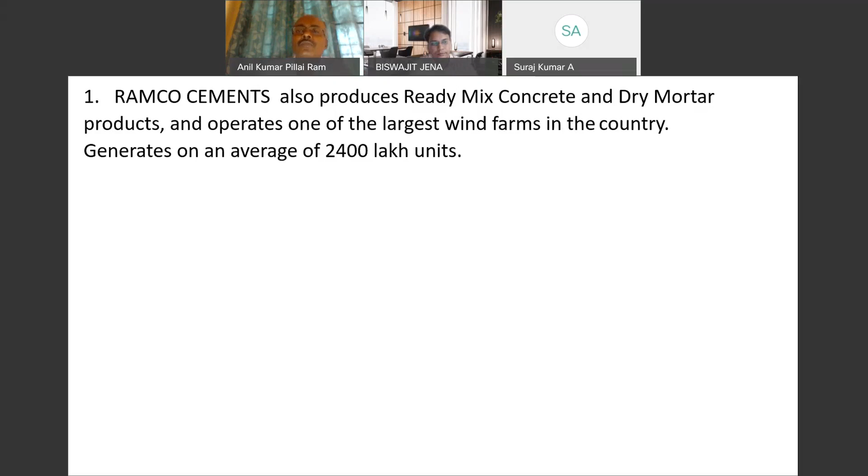Another thing we have tried to do is that whenever we make cement, apart from our research center, we also make concrete at our ready-mix concrete unit, so that we get the entire feedback of cement, concrete, as well as the research aspect of it. We ensure that the latest technology is incorporated at all stages of manufacturing, whether it's from mining, because in mining, if you see surface miners...

Anil sir, you there? I think there's a little technical issue. I think power has gone at Anil sir's place, Engineer Biswajit sir. In another minute's time or so, he will join in through the phone. We regret the inconvenience. He should be back any time now.

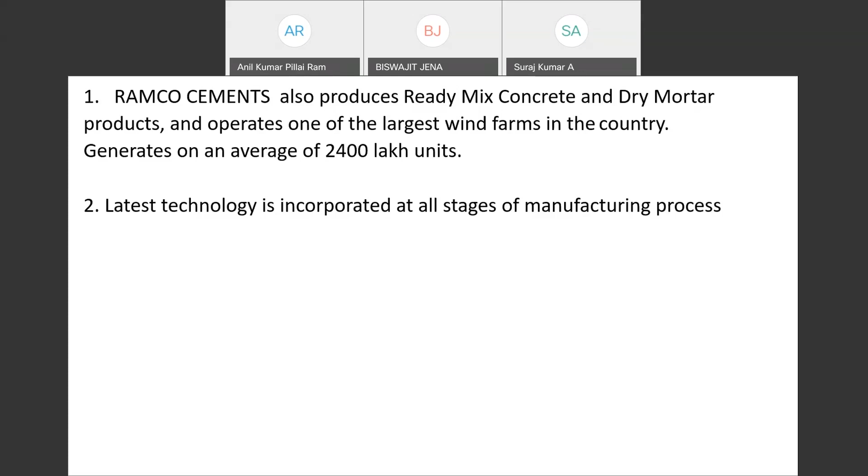I think the mic is muted, sir. I'll unmute it from my end. Bit of a connectivity problem from my side, so let me just share the presentation again. Am I able to share it? Are you able to see the presentation? Yes, sir, yes, sir. Biswajit sir, you there? Yes, I'm here. Can I request you to switch on the video, please? Yes, okay, thank you.

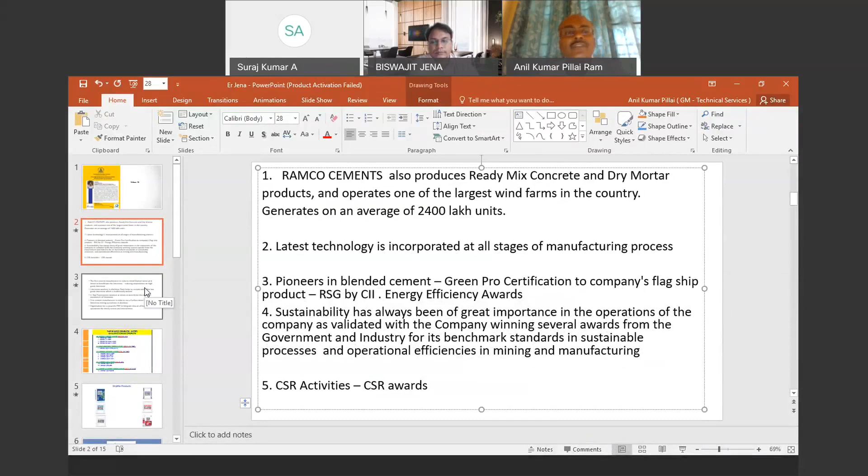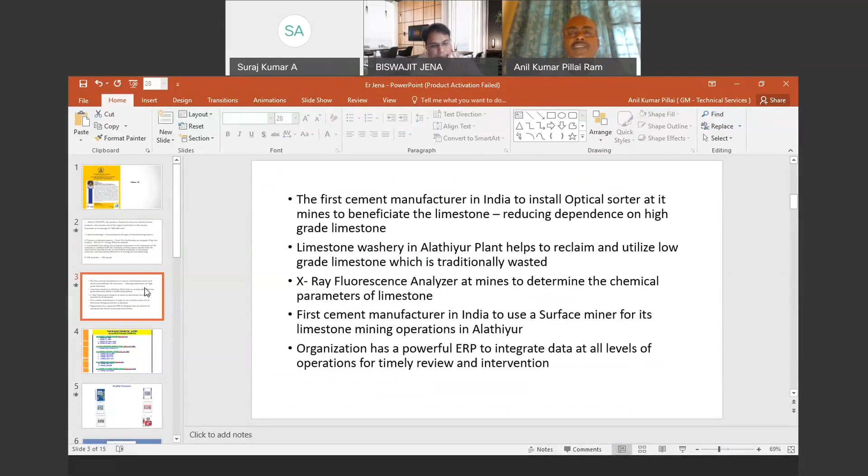It's getting loaded. So we have been doing all this, and especially as far as blended cement is concerned, we have been able to introduce blended cement and ensure that the various brands within it, whether PPC or PSC, we have been able to do that. Various kinds of testing equipment for testing raw materials as well as testing cement at various stages has been implemented, and that is a very important thing.

So, the customization of cement ranges from Ordinary Portland Cement, Rapid Hardening Portland Cement, PPC, PSC, as well as SRPC cement. Ordinary Portland Cement, as we know, the latest IS code talks about IS 269, and we have various brands of cement: 43, 53, 43 Infra, 53 Infra. Infra cement is meant for longer slump retention time. Then we have Ramco Superfast for precast applications, and Ramco Super Grade, Supercrete, Super Fine, Super Plus, which are various brands of Portland Pozzolana cement.

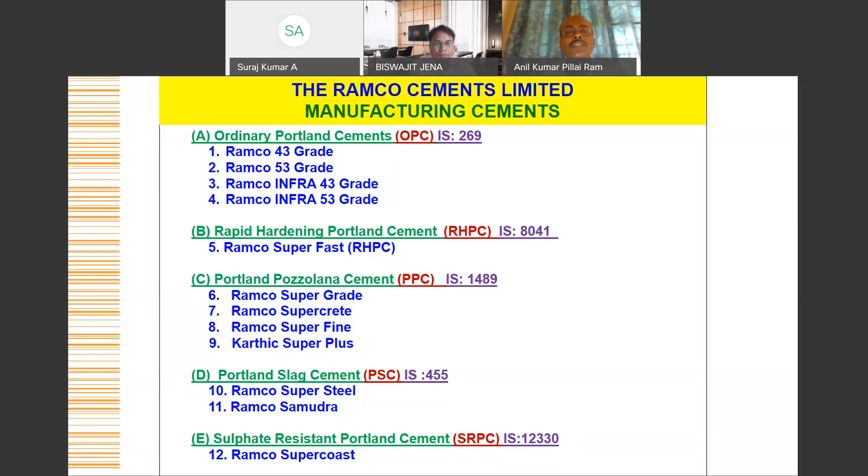Super Steel and Samudra for slag cement, as well as Super Coast for SRPC. So what is important is to try to understand the type of concrete being used, and then look at the type of cement, non-structural cement products from our dry mix plant, and of course the Ramco Supercrete cement, which has been introduced specifically for concreting.

It gives high performance concrete with regard to compressive strength, durability, as well as workability. This is the cement which we launched a year back, and it has got very good feedback from various professionals.

As far as these three parameters are concerned, high compressive strength they have been able to get, because if you look at small sites, the kind of practices they follow is not up to the mark. So what we have done is try to develop a cement accordingly.

Of course, it doesn't mean one should compromise on good construction practices, and curing has to be done. But what is important is that this cement gives high compressive strength and at the same time low heat of hydration. That is where you get a combination of high compressive strength, enhanced durability, and excellent workability. All these three parameters are there when you use Ramco Supercrete cement.

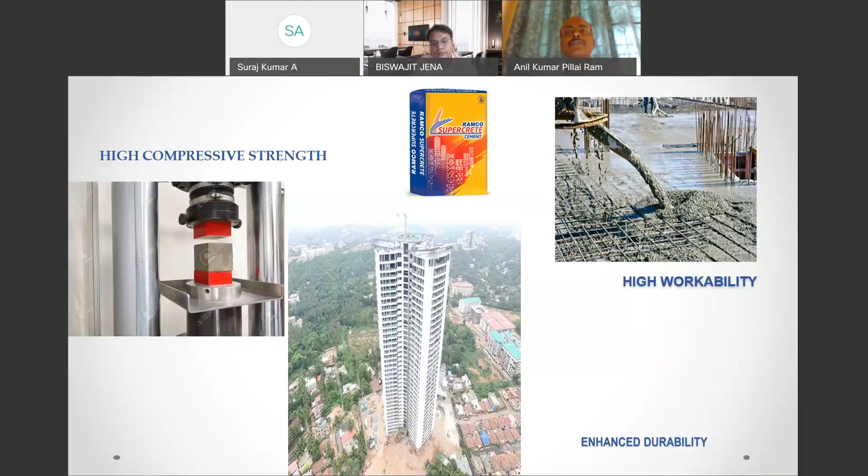We have the Ramco Research Development Center at Chennai, where we do a number of works, and that is very important, because if you see the R&D investment in the industry, it needs to be increased. That is where we have been able to contribute as far as R&D development is concerned.

We have various equipment to test the cement as well as to do mix design, and to ensure that our customer gets the best service as far as concrete is concerned.

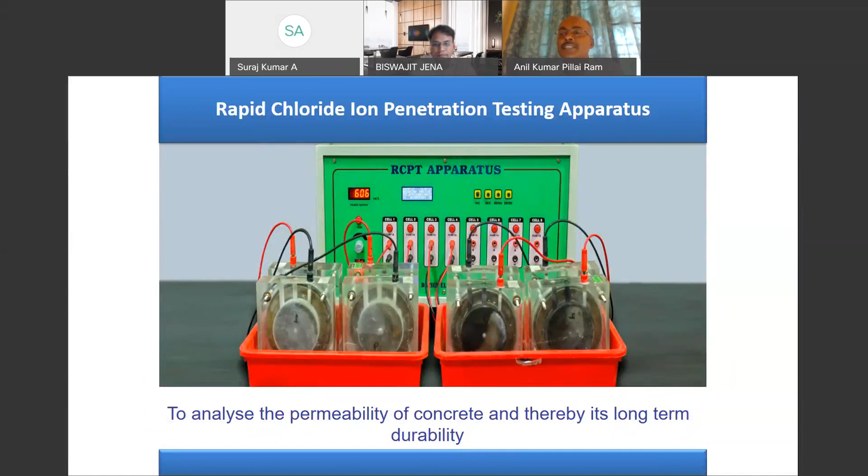So various kinds of testing methods for checking the durability of concrete. We have the rapid chloride penetration test, where durability is measured using a specimen, and charge is passed through it, and based on the amount of charge, you can evaluate the durability of concrete.

And then we have the DIN standard water permeability test, where water is passed under pressure, and based on the penetration of water, we can check the durability of concrete. So that is very important, and we give importance to the durability of concrete.

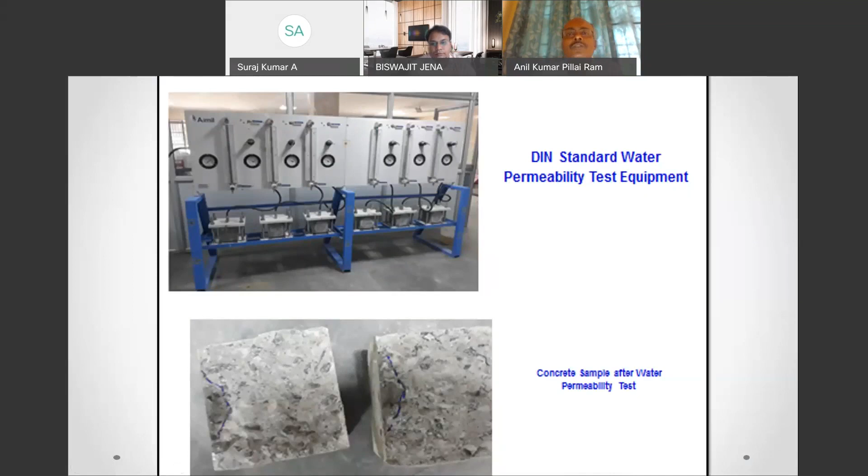So these are some of the things that we have got, and we work on the basis of right product for right application, because from an engineering perspective, that is what matters. We need to use the right cement for the right application.

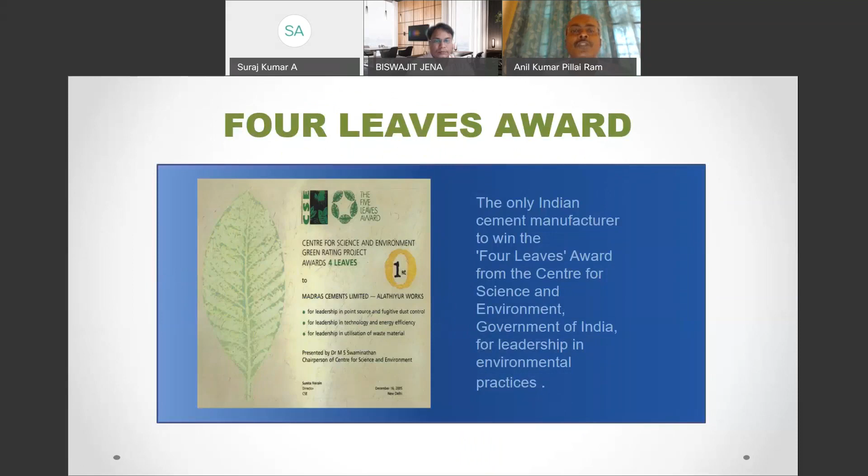Some of the awards that we have received include the 4 Leaves Award, and customers associated with us include Larsen & Toubro, ITD Cementation, and various projects in the eastern part of the country. We have a very good clientele in the eastern part of the country also, within a very short period of time, and that has happened because of the quality and kind of service we are offering, whether in terms of regular supply or quality parameters. They have been able to get it.

So these are some of the points that we thought we would share with you.

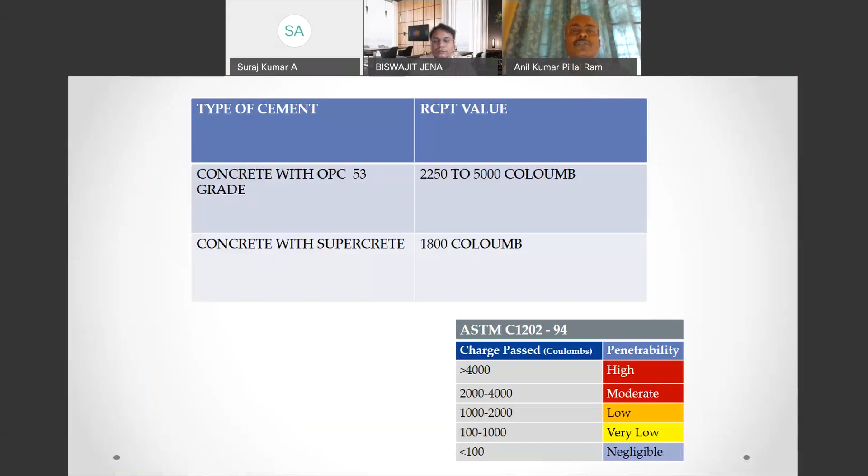As far as today's speaker is concerned, we have Engineer Biswajit Jena, Assistant Professor, Department of Civil Engineering, DRIEMS Autonomous Engineering College, Cuttack. He completed his BTech in Civil Engineering from KIIT University, Bhubaneswar, followed by MTech Structural Engineering from NIT Rourkela. He is a visiting faculty to the Department of Civil Engineering, CUTM, Bhubaneswar. He worked as a civil engineer and design consultant, associated with STUP Consultants Private Limited at Kolkata Metro, as senior engineer at Simplex Infrastructure, and assistant engineer at Nagarjuna Construction Company, IOCL Paradeep.

He was awarded a research project on waste utilization in self-compacting concrete and effective assessment of environmental benefits under the collaborative research and innovation scheme. He was also awarded twice as Super Teacher 2019 and 2020 by Lecture Notes Private Limited, Bhubaneswar. He was invited as keynote speaker on skill development initiatives for youth organized by College of Engineering and Technology, Bhubaneswar, and has provided research guidance to 20 MTech students so far, of which 6 have completed and 14 are ongoing. He has many research publications in renowned journals like ICE and International Journal of Civil Engineering and Technology.

So with those few words, let me invite Engineer Jena to share his presentation on ultra high performance concrete, because nowadays we talk about the performance of concrete.

It is not only compressive strength that is important, it is workability, it is durability, and measurement of all these parameters that gains critical importance.

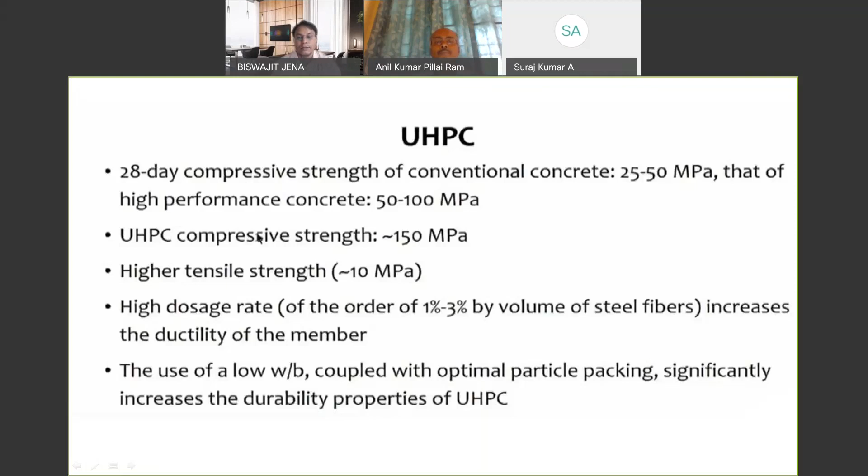A high compressive strength is not just enough for concrete when we are designing for ultra high performance concrete. You can have high compressive strength for certain applications, but you need high ductility also, along with high resistance to corrosion and aspects of durability. So the idea is that you can arrange the material microstructure through careful selection of materials, careful design of constituents, and proper construction practices to get a really high property of ultra high performance concrete. This is the main or core idea of designing ultra high performance concrete.

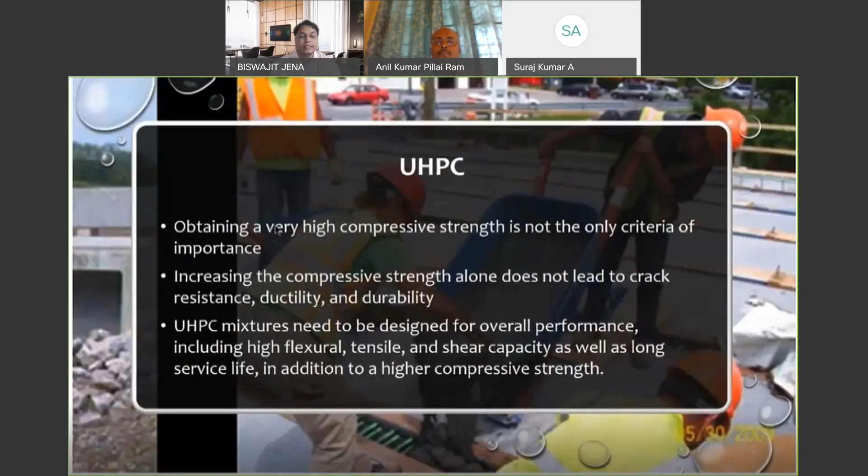Now, what are some advantages that you don't have with conventional concretes? You can get strength up to 100 megapascal with high performance concrete, but in conventional concrete, if you have really heavy load bearing members like bridge girders or bridge columns that carry extremely high loads, you need extremely tight rebar cages. If you have such tight rebar cages with so much steel, it obviously increases the cost of the structural member, and you need such dense reinforcement to control shear cracking.

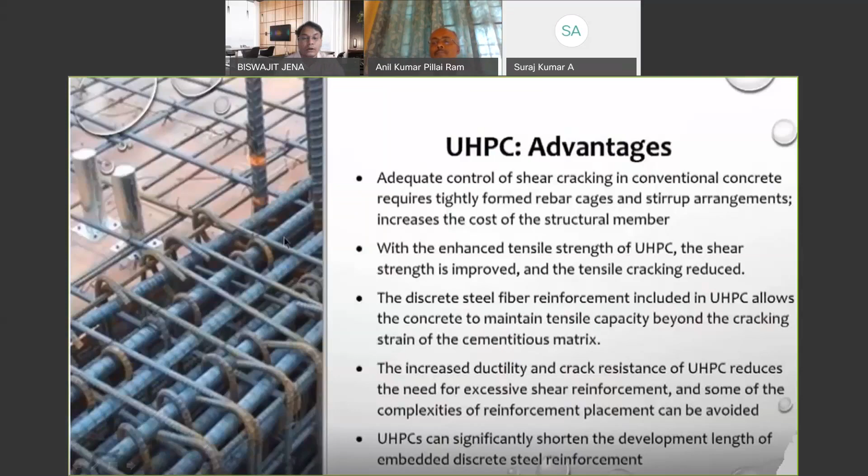So some applications are there with enhanced tensile strength. You can reduce shear cracking by improving the shear strength, and tensile cracking is also reduced. The discrete fiber reinforcement, steel fibers spread in a discrete fashion in ultra high performance concrete, helps in maintaining the tensile capacity beyond cracking, which means you have high ductility of the member. Also, if you have such high strength concrete, the development length for your rebars can be reduced.

So you have a lot of these types of advantages which you don't get in conventional concrete through ultra high performance concrete. A few applications have been used in the United States for a few years now for very selected applications. These are a couple of bridges: Mars Hill Bridge in Iowa and Cat Point Creek Bridge in Virginia.

These are some of the bridges that have used ultra high performance concrete in their construction.

The way they normally want to use ultra high performance concrete is for bridge decks, because bridge decks are supposedly carrying very heavy loads and are supposed to last for a much longer period of time. But before ultra high performance concrete was used for bridge decks, the more critical application was bridge connections.

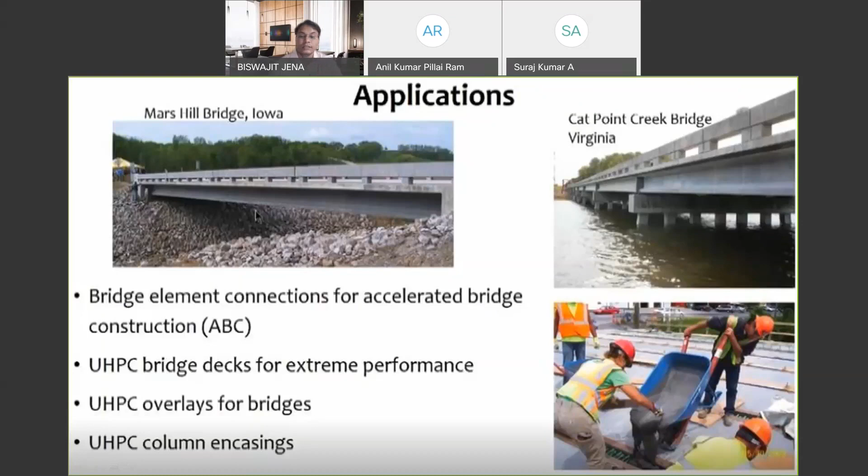Structural design is going to be different, but I will concentrate mostly on the materials part in this talk.

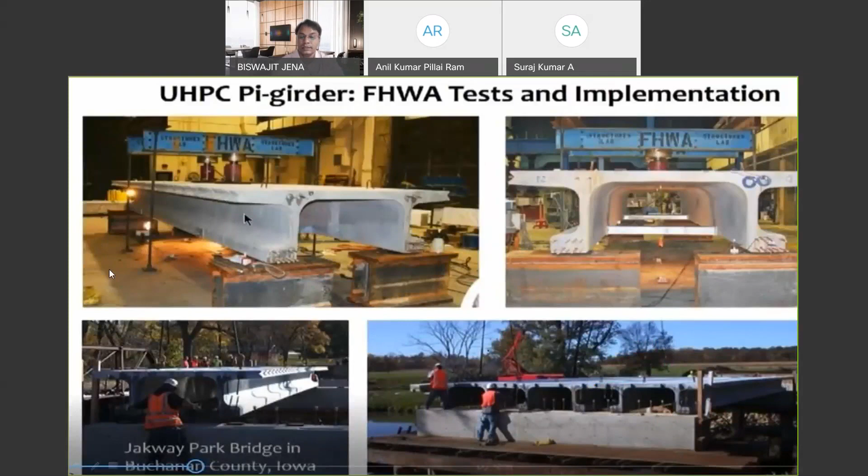Next, come to the field connections, like I talked about deck level connections. These connections are at the deck level where two panels of the deck are connected by means of ultra high performance concrete, or you can have the deck or girder connected to the support structure through ultra high performance concrete. So there are multiple ways of doing these connections.

The advantage of such extreme high strength is that the connections can be small, and you are always better off doing a smaller connection than a larger connection, because connections are where the weak point is. So you can now afford to have smaller connections, and you don't require post-tensioning of concrete within those connections because these have extremely high strength, including extremely high tensile strength.

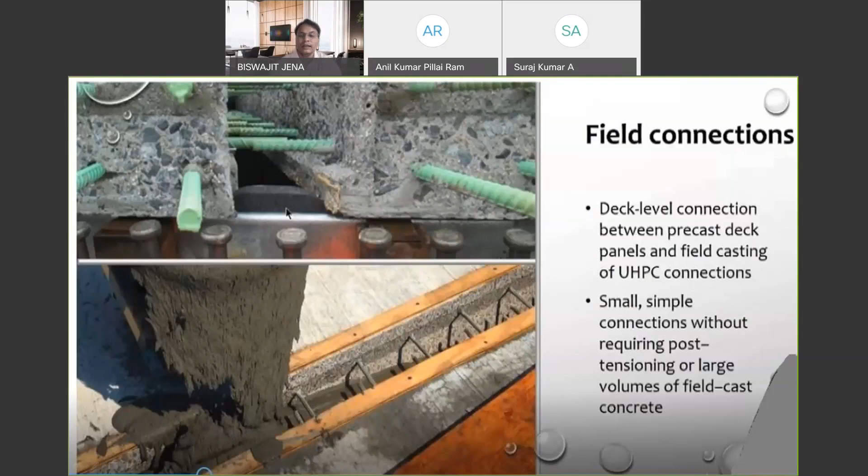So let's talk about material design. How do you design the ultra high performance concrete for such very high strength and very high durability?

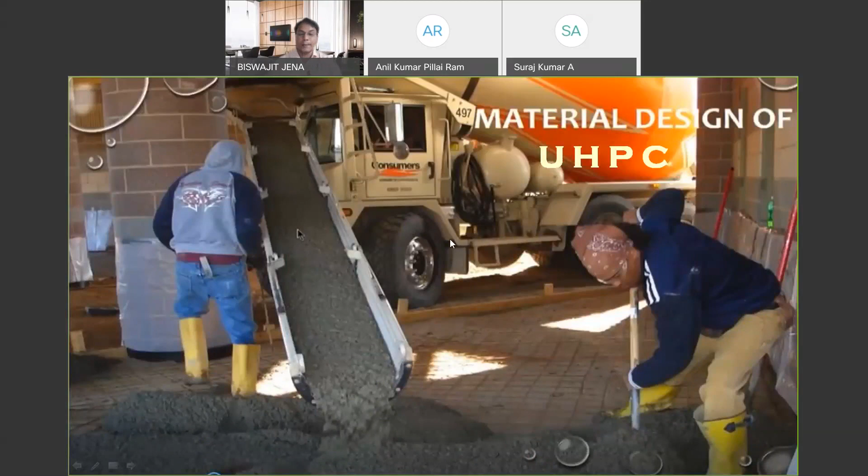The idea is that there are commercial mixers where you can buy commercial ultra high performance concrete mixes, about $2,000 per cubic meter, which is extremely expensive. To give you a perspective, conventional concrete costs about $125 per cubic meter. So that's talking about 15 to 20 times the cost, because these materials are proprietary with very special admixtures and additives.

But the idea is to make the science simpler, so that you can make these materials with locally available raw materials, making it easier for us to design the ultra high performance concrete. In that case, you don't have to go for very fancy powders or chemical admixtures. You can actually make it with locally available materials if you control what you choose to put in your concrete and how you make your concrete really well.

So you need extremely high admixtures. This is because your water cement ratio is going to be very low, lower than 0.2, between 0.16 and 0.18, which I will design in further slides. So it has to have a lot of admixtures.

Now we talked about connections. If you have to do connections, the concrete has to be self-compacting or self-consolidating to go and be poured into the connection, which I also showed you with very dense reinforcement casing in the previous slides.

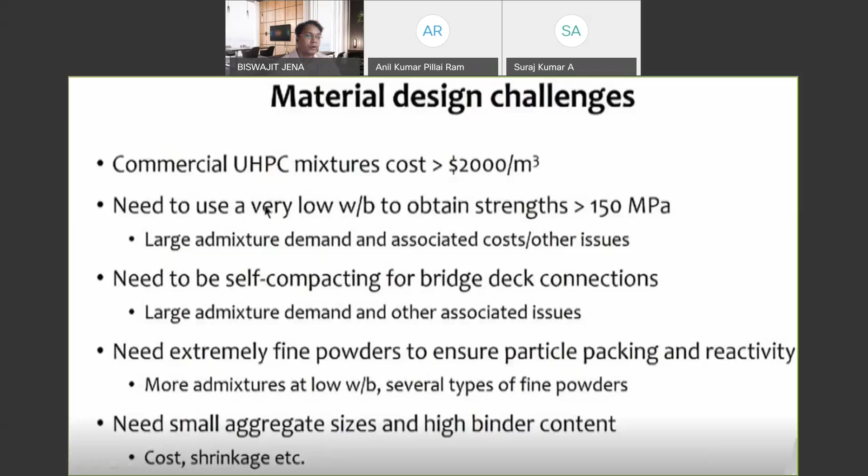So you have such a vast size distribution, and the other challenge is to make sure you have enough particles in all these size ranges to fill the pores really well, using a lot of admixtures to make sure this flows really well, so you can pour your concrete into all these very tiny areas. That's the challenge for us in designing ultra high performance concrete.

Next, we'll talk about this problem in two different stages - two different ways of doing it. You can have the deck and girder connections, or you can have connections between deck panels, and you can see the reinforcement in both cases being different.

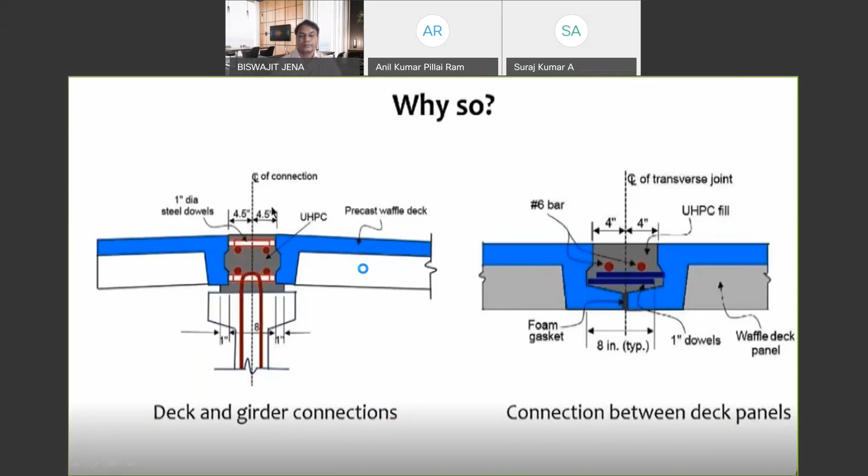You need a very high amount of Portland cement for two different reasons. My first reason is my water cement ratio is very low, which means only a small fraction of cement is going to be hydrating. If only a small fraction of cement is going to hydrate, I need more cement to make up enough of the reaction product.

The second reason is that I need a lot of fine powders, and cement, being a fine powder, has properties you can control really well. Those are the two reasons why generally we use a high amount of cement. But the downside is high shrinkage, so this has to be really well controlled in terms of curing and using materials like internal curing admixtures or superabsorbent polymers.

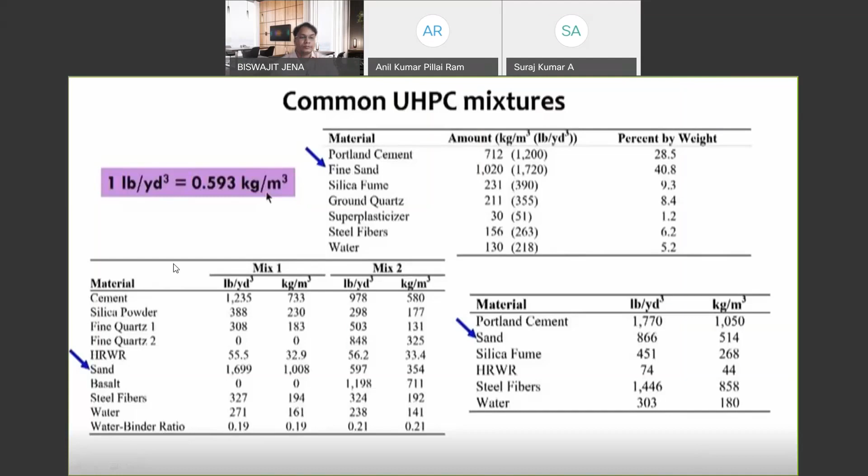So how do we design this material? How do we start designing from first principles? You have to select the binder materials you actually want, and that is the most important part. Cement is given, you need it. So if we use cement, what other than cement? What are the common ideas for selecting materials other than cement?

The first one is sustainability. If you have to make sure you are using as little cement as possible, you can use a lot of other base materials besides cement. The other aspect is that your cement has a certain size distribution.

If you look at particle size distribution of cement, you will have sizes from 1 micron roughly to about 100 microns. So normally it is distributed from 1 micron to 100 micron. So what happens to the sizes smaller than 1? We don't bother about sizes more than 100 micron because we have sand which will fill those spaces. But what about smaller than 1? In that case, the thing that comes to mind quickly is silica fume.

So you have to have materials that are smaller than 1 micron, which is silica fume. We can also have metakaolin, which you can use if you need some aluminate effect in it. So we have used both silica fume and metakaolin, and I will tell you why we have done that.

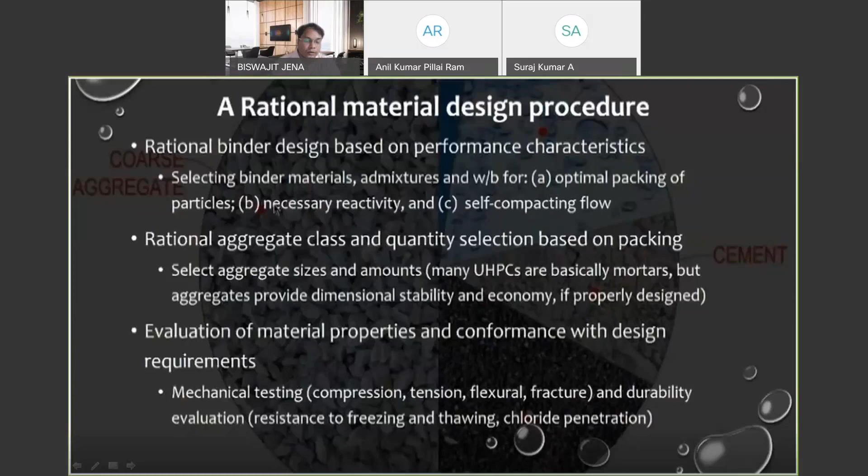So the first strategy is to design the paste, and this is the most crucial strategy, as you know. It is not because nobody knows how to design the paste, but because you have so many different combinations of materials that you can choose for the paste.

So the first idea should be what is locally available. Everybody has cement. Slag is generally available. Fly ash is generally available. Silica fume and metakaolin are not very hard to get, and generally most of the time people are using ground quartz because they take ground quartz and grind it really fine to improve the reactivity.

But generally you should avoid ground quartz because it is very expensive and also it is not very locally available. If we talk to a ready mix company to manufacture ultra high performance concrete, they will manufacture only with locally available materials. They are not going to source ground quartz, because for ground quartz they would need a different silo to process it. So it's not economical from that point of view.

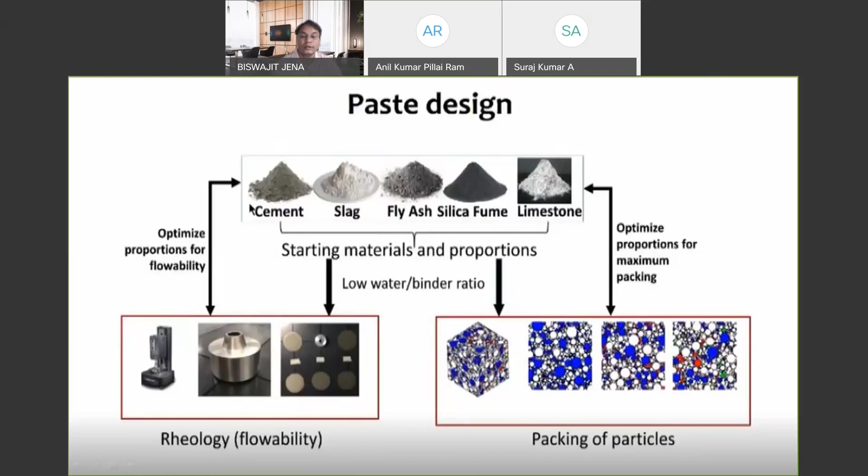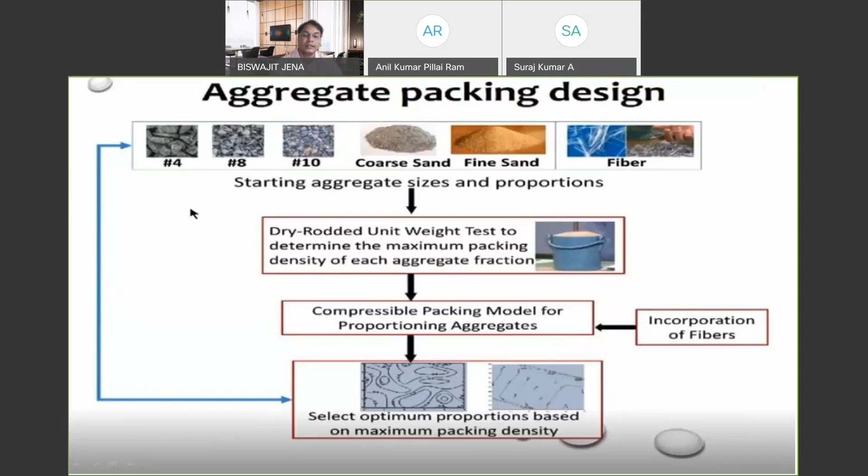First, then the second strategy is on packing of aggregates. I will give you a strategy and methodology on how to pack the aggregates, and then put paste in with the aggregates together to form the material we want for ultra high performance concrete.

So we have different types of materials, as I already said, and you can see here that we have cement, which has a median size of 11.2, slag with a median size of 8.9, fly ash with a median size of 17.5 to 17.9 microns, and metakaolin with a median size of 5.3.

Here I have not mentioned the silica fume because the size of silica fume is sub-micron. So then we use two different types of limestone powders of 3 micron and 1.5 micron size.

Here we have used limestone, but you can have alumina also from metakaolin, and you can have a combination of limestone and alumina to react better. That will be a better strategy than using silica fume, even though we have used silica fume also.

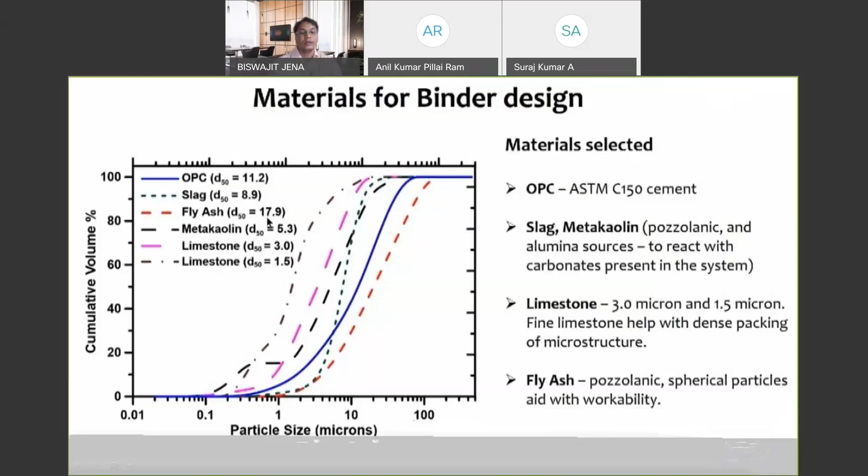So next, with the available materials, we designed a large number of paste mixes. For the study purpose, we have taken 33 mixes, having a very low water binder ratio of 0.24. Theoretically we have taken 0.24, but actually even less than 0.24 we have taken.

That is 1.25% of high range water reducing admixture, which is a polycarboxylate based water reducing admixture, and 1.25% solid by mass of binder, which actually translates to about 5% of superplasticizer by mass of cement. 5% means I will show you how to add that, the designing part.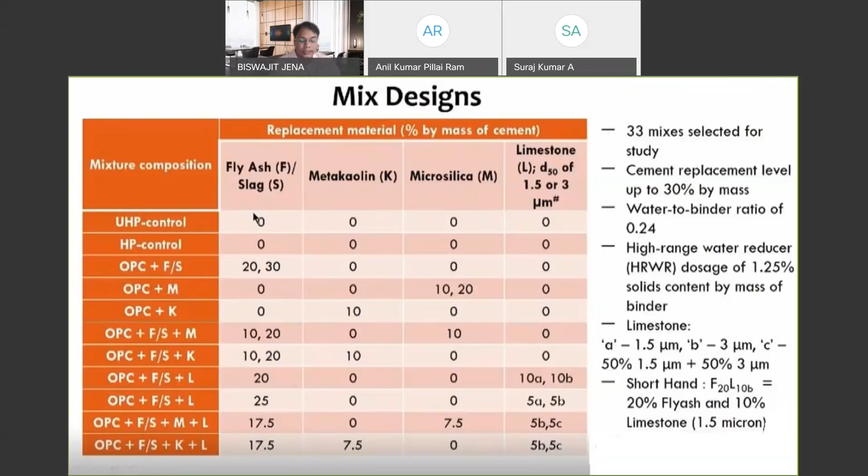In that case, nothing is going to happen. So I'll show you the different mixing methods that need to be changed if you want to design this type of ultra high performance concrete.

So next, microstructural packing parameters. For packing, we did some computational work. Again, this doesn't have to be computational if you know what you are using, but we wanted to do a wide range of materials so that we can start looking at the packing of all these materials in different spaces.

Coordination number means the number of nearest neighbors. So what is the nearest number of each particle? If I take one particle, how many nearest neighbors does it have? Basically, how many particles it has in touch with that particle. So what is the significance?

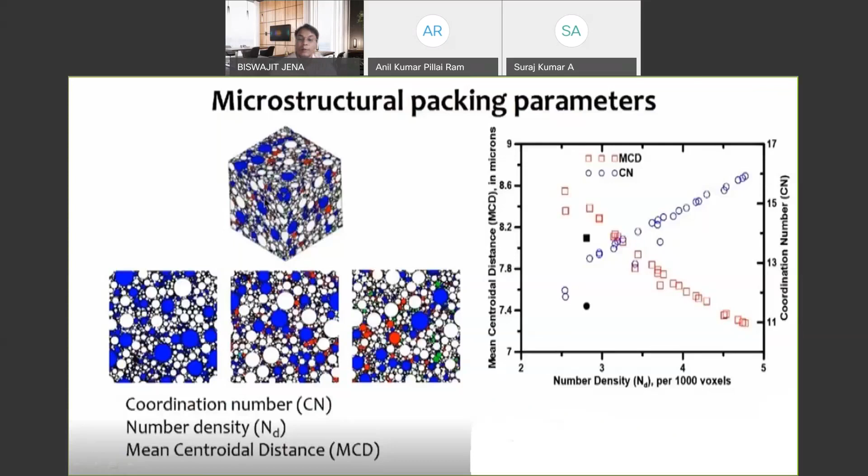Next, come to the rheology parameters. Because you want to have this thing flowing through a space, because you want to flow this through dense reinforcement, you need to control the rheology.

So I have done yield stresses, plastic viscosity, and mini-slump tests, because generally all laboratories cannot afford a rheology test, so we test through a mini-slump instead.

To design such mixes to have yield stress and plastic viscosity measured using a rheometer is very expensive. So we'll go for a mini tool, a simple tool called mini-slump. We do a mini-slump flow test and we get a rheological parameter from it.

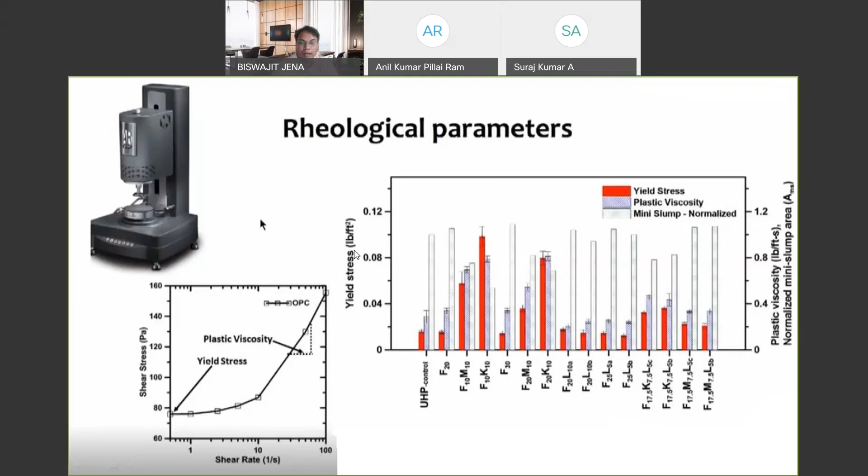Using these two parameters, I can show you that we have done 33 mixes. We defined what is called the packing coefficient, which is just a simple mathematical transformation of three parameters: coordination number, number density, and mean centroidal distance.

Coordination number means the number of nearest neighbors. As already told you, the more the number of nearest neighbors, the higher the packing, so I put that in the numerator. The second one is number density, the number of particles in a unit volume. More particles means better packing, so I put that also in the numerator.

The third one is the mean centroidal distance, the distance between a cement grain and like or dislike particles. The closer they are, the better the packing, meaning smaller the distance, better the packing, so I put that in the denominator. This gives me a packing coefficient, which is the exaggerated combined effect of number density, coordination number, and mean centroidal distance.

We get a packing fraction, and this packing fraction has to be greater than the packing fraction of a control mix that has only cement, just to have some kind of comparison. You can use any comparison tool—it doesn't matter if you say 2 times, 5 times greater, or 0.5 times, depending on what you actually need. That's where a designer comes in and decides how much more packing, say 5 times or 8 times, compared to a plain cement paste.

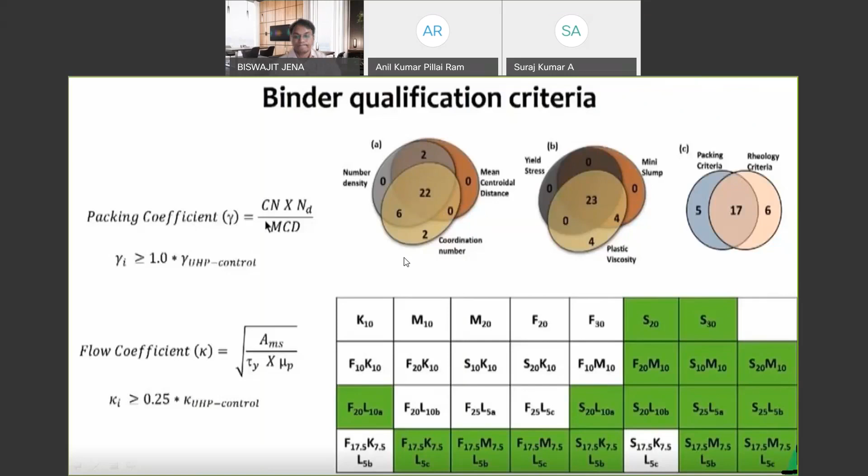Next we'll go to mortar strength. We did mortar strength testing and you can see we get up to 150 megapascal strength after 28 days, with 35% aggregate and 65% paste. You normally see it the other way in mortars and concrete—you need that amount of paste to satisfy workability and strength criteria. We get 170 megapascal after 90 days with all these mixes which have 30% cement replacement. That's fairly good.

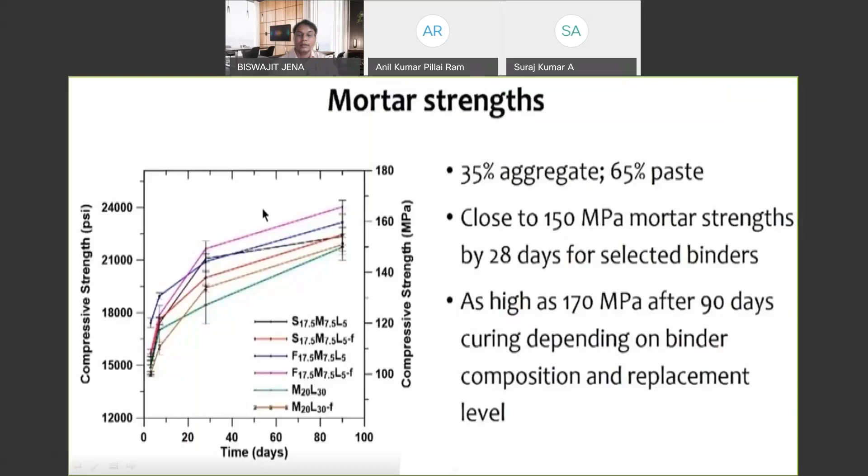Now, aggregate packing—how do you do it? If I have one size of aggregate, the best I can do with a small size aggregate is get a packing fraction of 0.91. But if I start adding more and more, you get a separation effect; with spacing differences and so on, your packing fraction starts to come down. Again, this isn't applicable to all sizes—it's applicable to really small sizes at the micron scale.

If you look at hexagonal close packing, you get 0.74, which is the theoretical maximum packing, and you can also manipulate this by adding a few more sizes to get to a higher value.

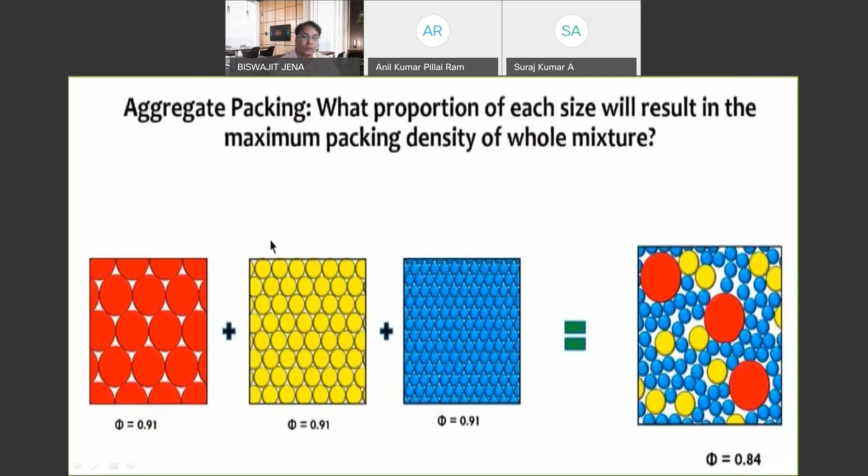Next, this is a challenge for us. What happens when you have irregularly shaped aggregates? The challenge with irregular aggregates is something called virtual maximum packing density. We want as much aggregate in concrete as possible, because aggregates give dimensional stability, control shrinkage, give better properties, and give higher elastic modulus. So you want all of this, but packing these aggregates is a challenge because the shape and size are very different.

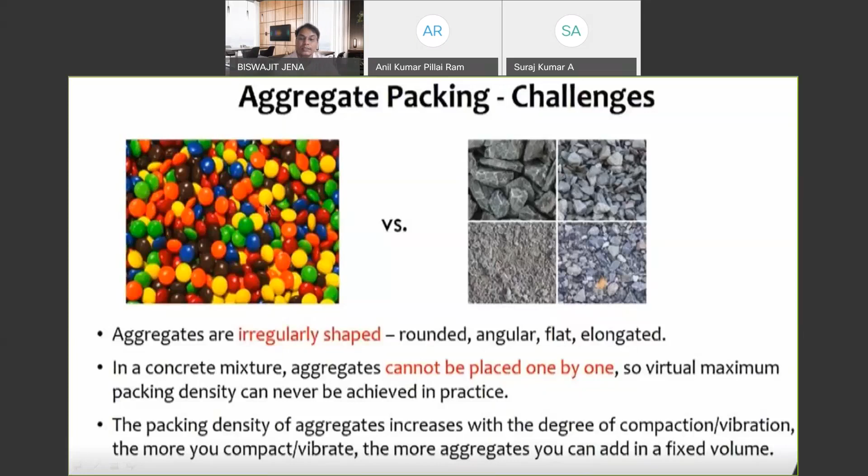We also use two different sands: a coarse sand with a median size of 0.6 mm and a fine sand with a median size of 0.2 mm. We also used steel fibers with diameter 0.2 mm and 13 mm long. We separated all these aggregates into different sizes, because you really have to pack them well, and then use what is called the compressible packing model.

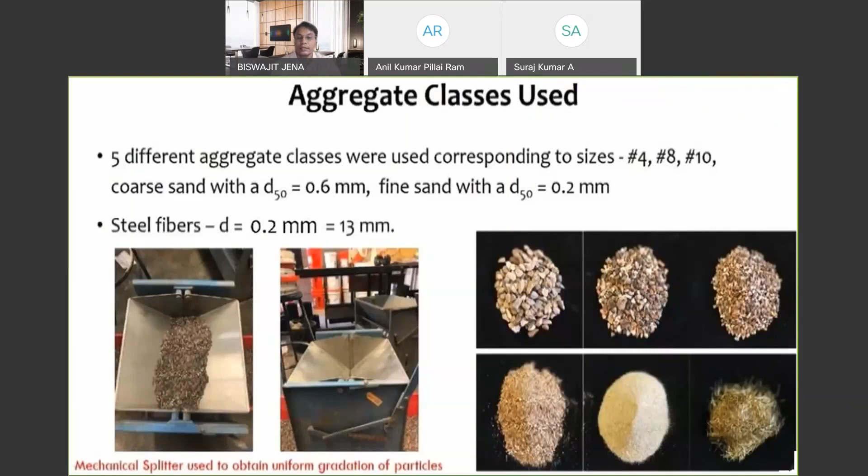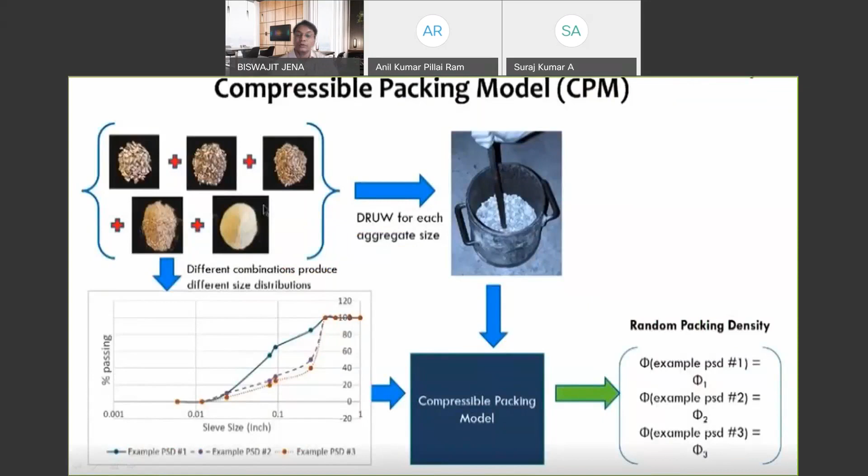This is called CPM, the compressible packing model. To get all the different sizes of aggregates, you get the dry rodded unit weight for each class of aggregates, put them into the compressible packing model along with particle size distribution, and come up with random packing densities. Using a MATLAB program, these are some plots for more than 885 different aggregate combinations.

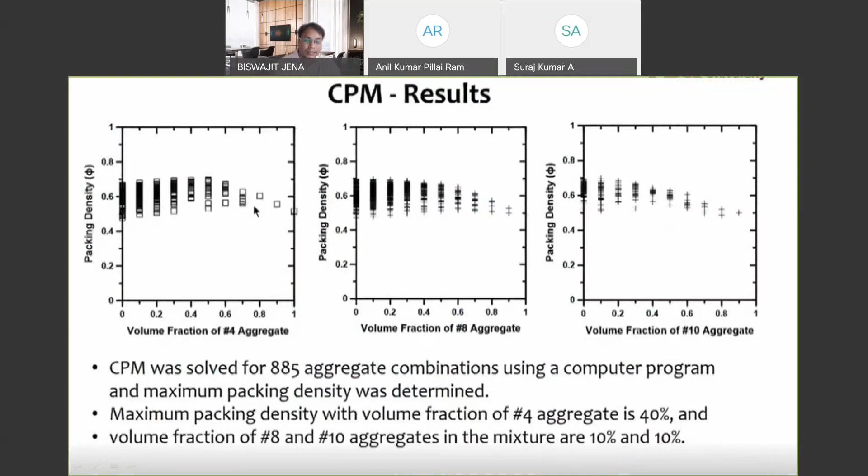We have a MATLAB code formulated so the mixing design can be done within 5 seconds. You plot the random packing density as a function of volume fraction of different aggregates, and you can find where the maxima in packing density is for different combinations.

Based on those combinations from the MATLAB code, we picked the one with maximum packing density, which in this case is 0.696. This includes 40% of number 4 size aggregates, 10% of number 8 aggregates, 10% of number 10 size aggregates, 20% concrete sand at 0.6 mm, and 20% fine sand at 0.2 mm.

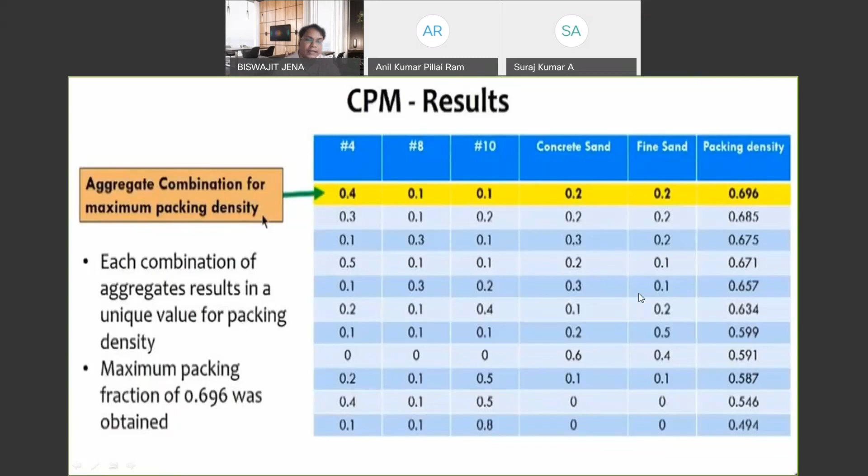We have also incorporated fibers. These long fibers in this matrix of aggregates are going to displace some of the aggregates, and you are going to have lower packing anytime you put in something of a different aspect ratio. You will see that the maximum packing density is reduced a little with the addition of fibers, but the advantage is that the fibers give so much in terms of ductility, so you can increase the ductility of the ultra high performance concrete.

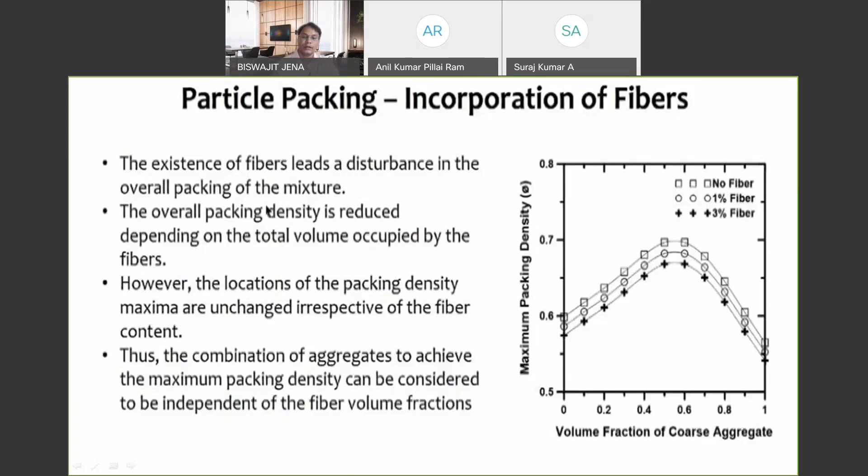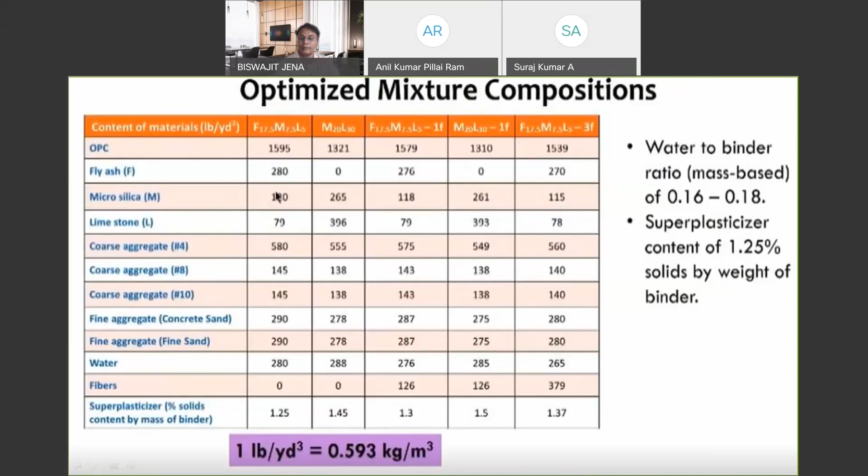Here is the final mixture composition. I used the selected aggregate combination shown earlier: 40%, 10%, 10%, 20%, 20% by mass of all these aggregates, and two different paste mixes - one with fly ash, micro silica and limestone, and the second with limestone and silica fume. These are two different mixes, with and without fibers, with water-to-binder ratio 0.16 to 0.18, and a super plasticizer dosage of 1.25% by weight of the binder powders, about 5% by weight including the liquid content of the super plasticizer.

Next, we will come to designing the ultra high performance concrete. So how can we actually do this?

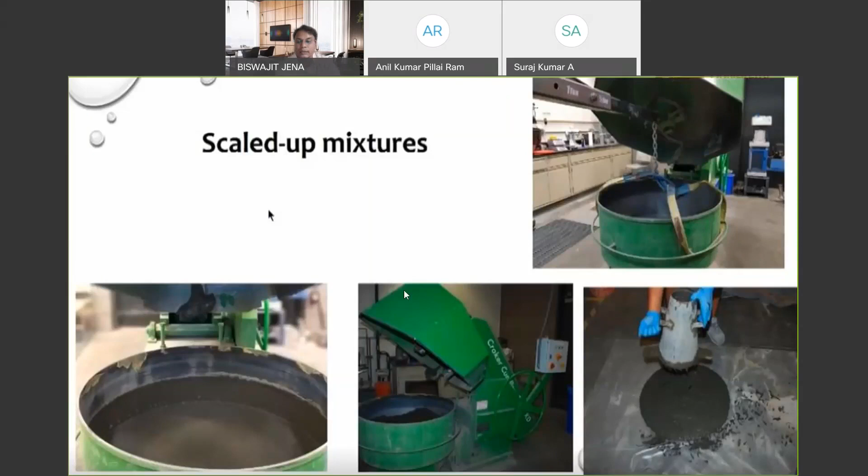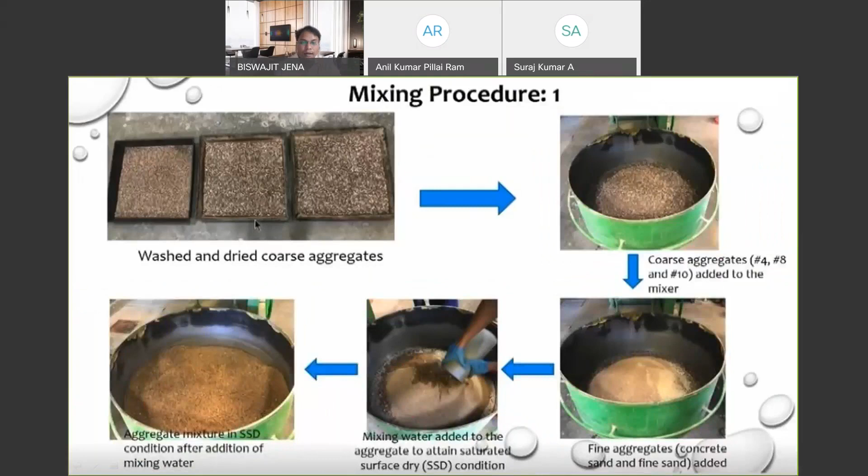First, the aggregates are washed and dried, then added to the mixer. Fine aggregates are added, and mixing water is added to the aggregates to attain a saturated surface dry condition, then mixed together to blend all aggregates. Silica fume is added first to break down the silica fume agglomerates - you put the silica fume in and disperse it by mixing, then add the limestone, since limestone is the next larger size. Mix this well to get a good blend, and then add fly ash.

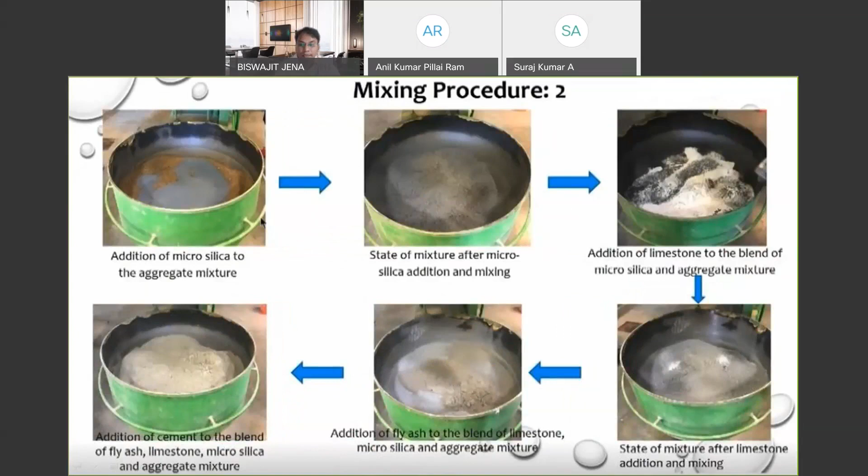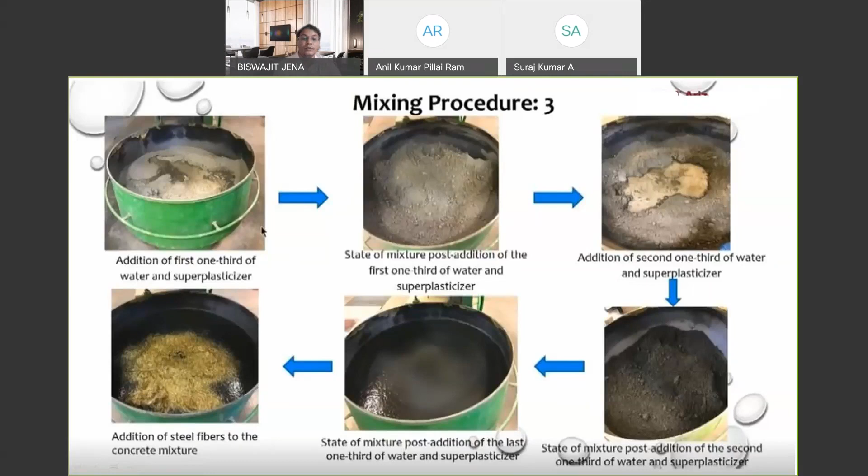Now you add the last 1/3 of water and superplasticizer, and you see the mix being extremely fluid. You add steel fibers at that time and mix it.

The mix obtained is so good that even with that flowability, there is absolutely no bleeding, no segregation, and you see a very cohesive, very dense mix. It is very hard to believe that this is a less than 0.2 water cement ratio mix. So you need intense mixing, and you need to mix it for a longer period of time at high shear.

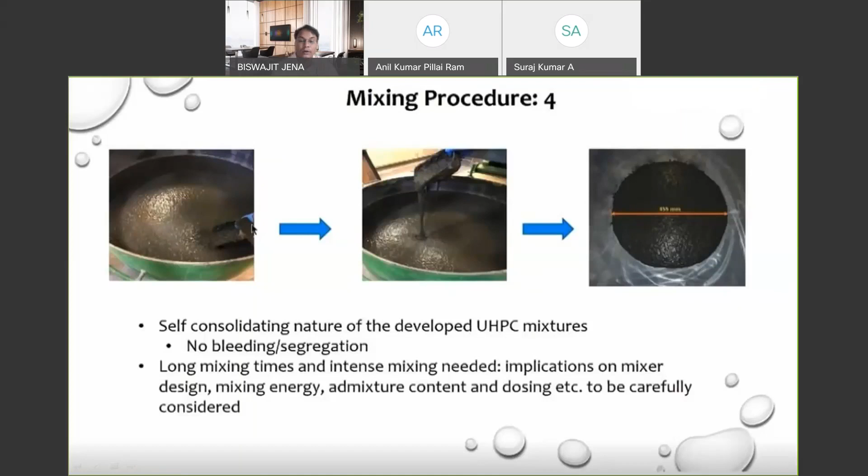Now you have a good ultra high performance concrete mix, which we designed from first principles by packing of particles, by controlling the rheology, by selecting aggregates of sizes, so that all those properties should be satisfied.

Next, properties of ultra high performance concrete. I will show you only a few properties of interest, regarding mechanical properties like compressive strength, flexural strength, and durability properties like sorptivity.

First, compressive strength. So let us talk about the compressive strength. If you just do a simple compressive strength test, we'll say that I have 150 or 160 megapascal strength. But like I showed you earlier, the reason why we use ultra high performance concrete is not just for strength.

Strength is one thing, but we also want to know how we can use this material in designing structures. If you do the design of reinforced concrete structures like bridges, girders, or columns, you actually want to know the complete stress strain response and the lateral response. So the testing has to account for both the axial deformation and the lateral changes in dimension, both properties like axial and lateral strain.

To do that, we are doing this in a displacement control mode, in a closed loop testing with a radial strain control, because your radial strain is much more, and your overall volumetric strain is axial strain plus twice the radial strain. So your radial strain is very sensitive, and you have to control the radial strain after you have loaded to about 50% of the peak.

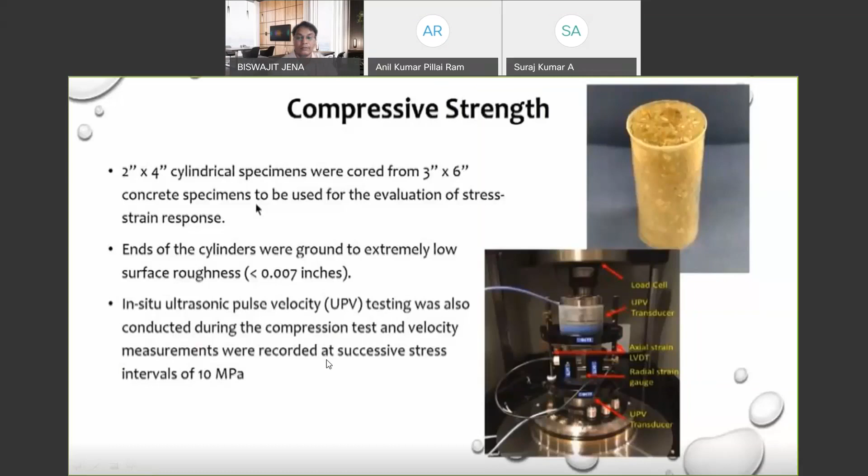Next, here is the complete axial stress and axial strain, and axial radial strain curve for non-fiber reinforced ultra high performance concrete. You can see the maximum strength is 150 megapascal, and the maximum axial strain is about

0.35%, which is basically the maximum allowable strain of concrete in the design. So the first understanding is that ultra high performance concrete does not change the maximum axial compressive strain capacity of concrete in an unreinforced state, or without reinforcement.

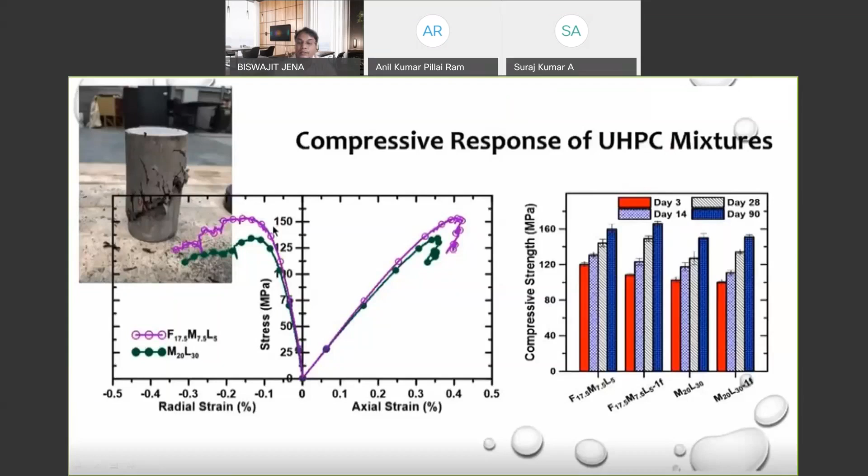So the strength, as we can see, is up to 160 and 170 megapascal, depending on the kind of mix. You will see the failure pattern of the mix right here. Again, very high strength mixes fail in this fashion, as you would have seen.

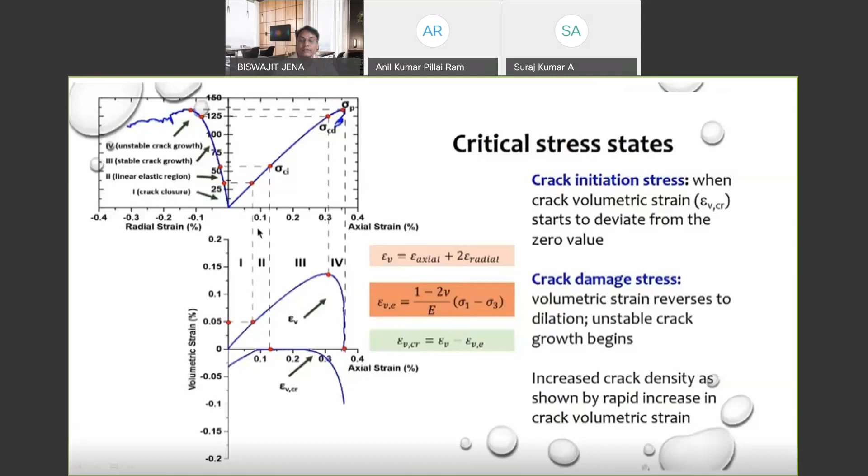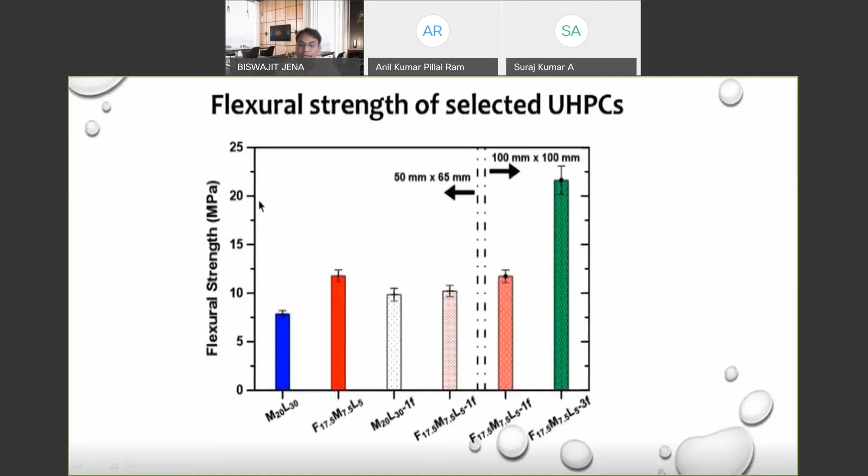Next we will go for flexural strength of ultra high performance concrete. Generally 20 to 25 megapascal of flexural strength for these materials if you have fiber reinforcement, giving extremely high flexural strength.

So here you can see the effect of fibers again. You see here the fibers bridging the cracks - a lot of fibers active in flexural failure.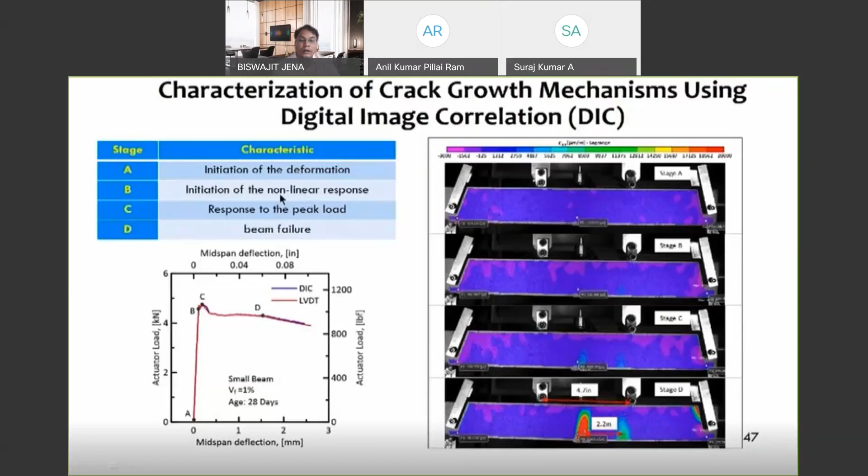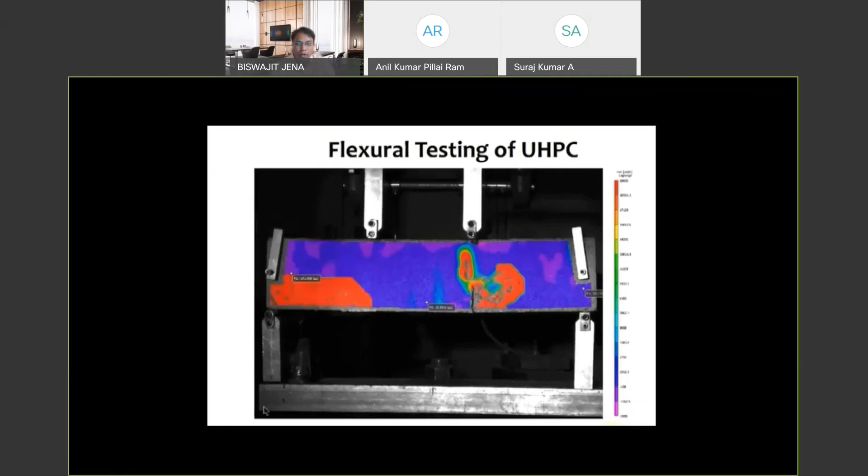So this is the flexural testing of ultra high performance concrete. I will show you a picture of how the pattern is emerging as a function of loads. So these are all the stages I've shown you in this video. You can see compression and tension. You see tension building up in the blue, and those flame-like shapes coming up at the bottom — those are the strains. When you start to see the red, can you see the crack here now?

If you theoretically calculate the process zone as some value of strain, you can quantify what the process zone is and how it changes with load. You will see random cracking, and you will see extremely high strains at different locations. Okay, so finally we go for a few notes on durability.

Here we have tested the sorptivity or water transport. This relationship regarding durability is also tested if you go for the RCPT test. You initially measure sorptivity, which is the water intake immediately after you put it in, for 6 hours, and then long-term sorptivity measured for 10 to 14 days. The initial sorptivity is governed by the larger pores, which can absorb a lot of water early on. The long-term sorptivity is also governed by some amount of diffusion through the smaller pores in the material, though it's not completely diffusion-controlled. It gives a fair indication of the size of smaller pores in the material, and you can see the secondary sorptivity is much lower.

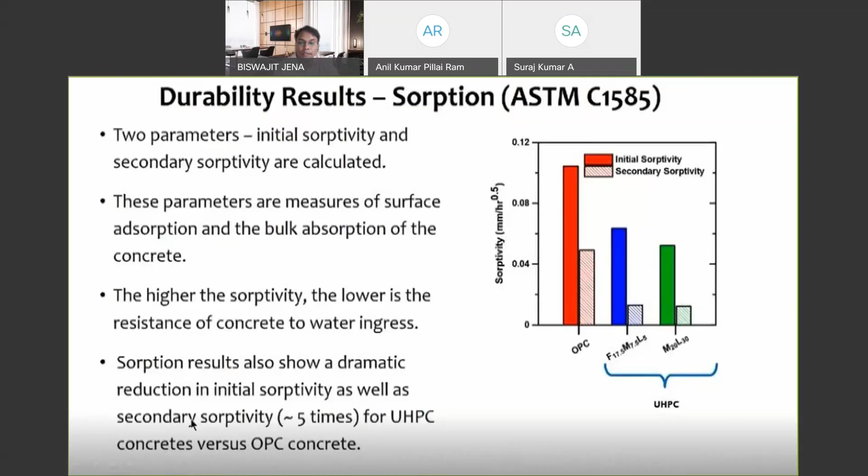So next we go to the design of ultra high performance concrete. Finally, I'll give you one little note on design. There is conventionally a different design philosophy here. The picture on the left is the ultra high performance concrete section with just steel fibers.

The immediate thing to notice is that there is no change in the strain diagram — it's exactly like a conventional concrete strain diagram with 0.003 as the maximum concrete compressive strain — but there are changes in the stress block. The concrete below the neutral axis should not just be wasted; a significant amount of tensile stress is carried by it. So there are two advantages here. First, if you design a high strength concrete section, your neutral axis shifts, and a lot of concrete below gets wasted depending on the application of the beam. But now that concrete won't be wasted — it has a certain tensile capacity that can be used beneficially.

The second advantage is what we call a hybrid reinforced section, where you have a reinforced concrete beam with ultra high performance concrete that has some fibers. So you have a multiple effect: the area below the neutral axis has a tensile contribution from steel, which is the area of steel, plus the tensile contribution of fiber reinforced concrete. You develop a constitutive model for compression and tension — the compression model is a bilinear curve, showing increase in compression, elastic, then plastic region — and for tension it's a trilinear curve, with an increase in tensile stress, a drop, and then a plastic region in the tensile zone, each with different parameters. With this, you can design your section much more efficiently and economically, using the advantages of the concrete.

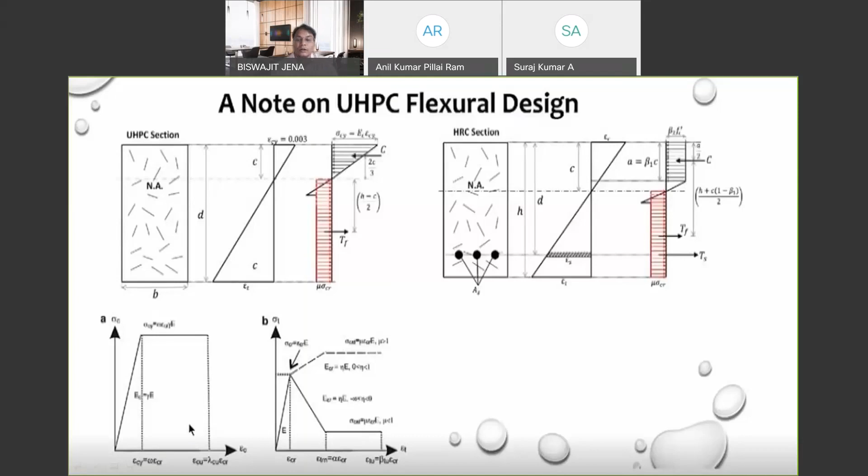So in summary, you have a multi-level particle packing approach, both for the paste fraction and the aggregate fraction. The paste fraction is achieved by packing of particles and rheology, and the aggregate fraction by what we call a compressible packing model, though you can use any kind of packing model. You can achieve very high compressive strength, flexural strength, and ductility, and durability is also very high. We've done cracking tests, and cracking propensity is low, provided you cure the material really well. There are issues with autogenous shrinkage, which must be well controlled by mixing in self-curing properties or similar materials, and this can also be accomplished through a robust, rational mixture design procedure.

You cannot use general mix design procedures from standard available methods, where the main parameter is usually the water-cement ratio — here, water-cement ratio is basically a secondary parameter. The first priority is always the packing of particles; the water-cement ratio is just what's required to make it flow and fill. So you need careful material design to ensure economy, along with structural design modifications to account for the significant improvement in tensile capacity. It is this tensile capacity and ductility that makes this material very different from conventional concrete.

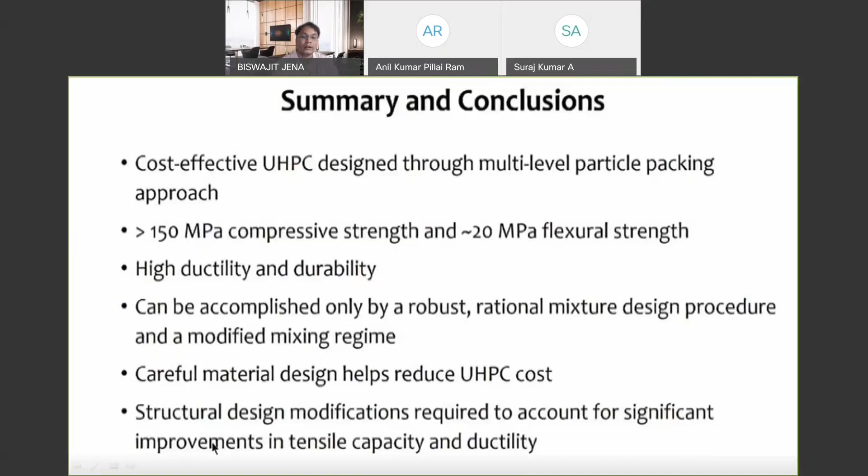Finally, I have some useful references here for anybody wanting to look further, and there are different papers that nicely explain the entire particle packing and mixture design philosophies. First, I have mentioned Narayanan Neithalath, who has published a paper titled Microstructural Packing and Rheology Based Binder Selection and Characterization for Ultra High Performance Concrete, published in Cement and Concrete Research. Actually, all this material I have borrowed from this paper. You can refer to it—he has nicely explained packing of particles and the designing of ultra high performance concrete. You can go through this to get in-depth knowledge.

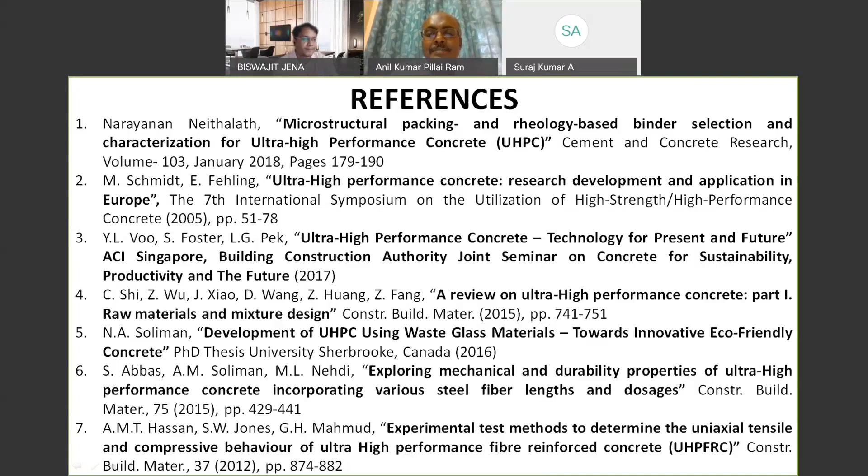Thank you so much, Mr. Jena, for that interesting presentation on ultra high performance concrete. We had a very interesting discussion—you had even touched upon how to utilize the best properties of concrete in the design, which is very important, as well as the various properties of ultra high performance concrete.

That is well answered, because based on the requirements at site—supposing you have congested steel reinforcement, then you will need higher workability and self-compacting characteristics, that is good. So whenever you enhance a particular property in concrete, whether workability, strength, durability, or a specific parameter, we are just calling it by different names. But ultra high performance concrete is something having much higher strength, more than 150 MPa. I have already given some applications—if you are constructing a bridge deck, bridges, or very high strength columns, you can design ultra high performance concrete for those structures.